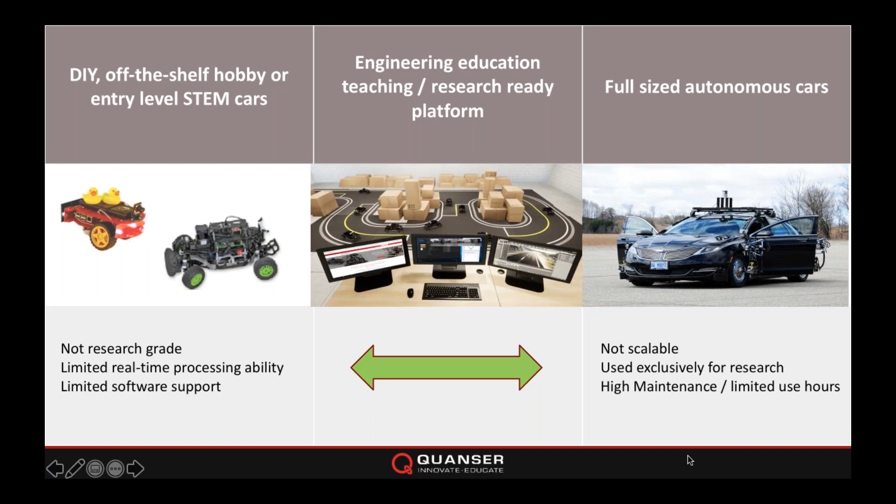So what we decided to do was to take it to the next level and come up with an entire studio, an ecosystem that would not only be able to address the problems that we defined on the left and on the right, but also act as a student-proof and academically appropriate platform for teaching and research when it comes to self-driving cars. So that's how this whole thing started.

And at the end of the day, we came up with what we think is the only validated platform that can be used to accelerate, expand, and sustain research in self-driving technologies. What we mean by that is that if you look at research groups out there, there are new research groups just starting, and they need to start producing results in a very short amount of time. So this studio is designed to help these groups jumpstart autonomous car research programs in a very short amount of time and establish new research capacity in AI, machine learning, and all the sub-related areas, as well as having access to an academically appropriate solution that allows the research team to go from idea to full implementation under a single umbrella and using a single platform.

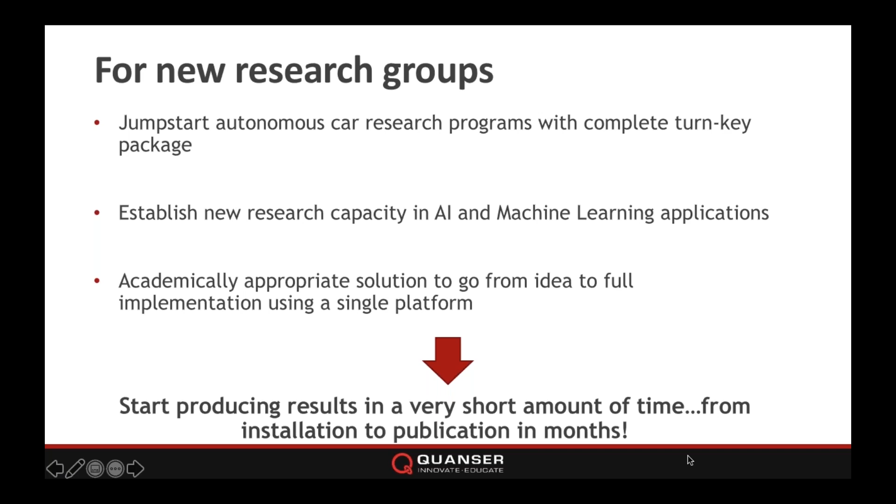And at the end of the day, what this means, bottom line, for the research group is that they can start producing results in a very short amount of time that otherwise they would have spent creating, maintaining, or troubleshooting a platform, and they can go literally from installation to publication in months. But you also have a whole bunch of existing research groups out there that have a whole bunch of platforms, anything from what we saw earlier on the far left or the far right could be out there already. So how can we help those existing research groups?

Well, this can help them expand their research portfolio in terms of hardware and software. Not only can they grow the collection and variety of the vehicles they use in their labs, but they can also, in a very short amount of time, add support for the languages they weren't using, but were hoping would be available for cross integration between their vehicles. So at both software and hardware level, this is an expansion for existing research groups, as well as it helps them get rid of the dirty work they're definitely familiar with, which is the work of cross compatibility and integration between multiple development environments.

And again, what this means, bottom line, for existing research groups is that it will create a major shift in their group efforts and their group behavior. It will create a massive wave moving away from maintenance and housekeeping to doing actual research and validation and producing results. So what is it? Let's start looking at it.

Actually, the centerpiece, or the star of the show, the star of this studio, is obviously the car itself, the QCar. It's a 1/10 scale model of a car.

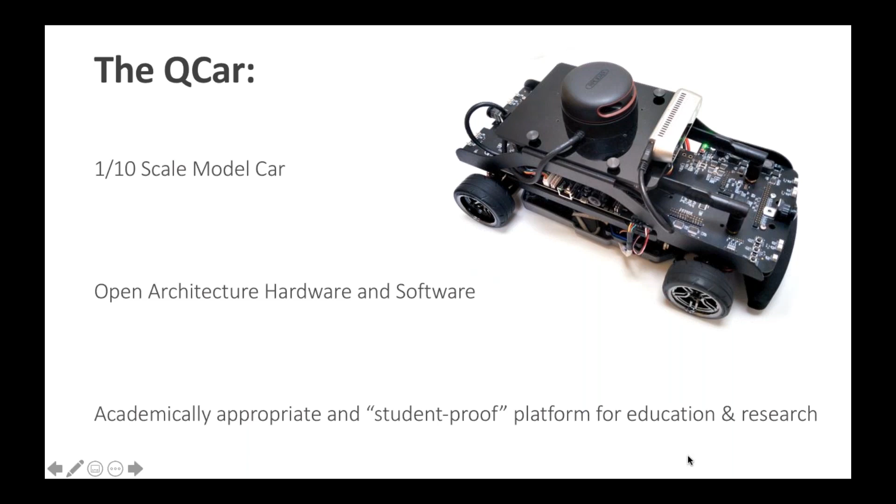Completely open architecture, both in terms of hardware and software. Most important is that it's an academically appropriate and student-proof platform for education and research. So of course, it's sensor rich.

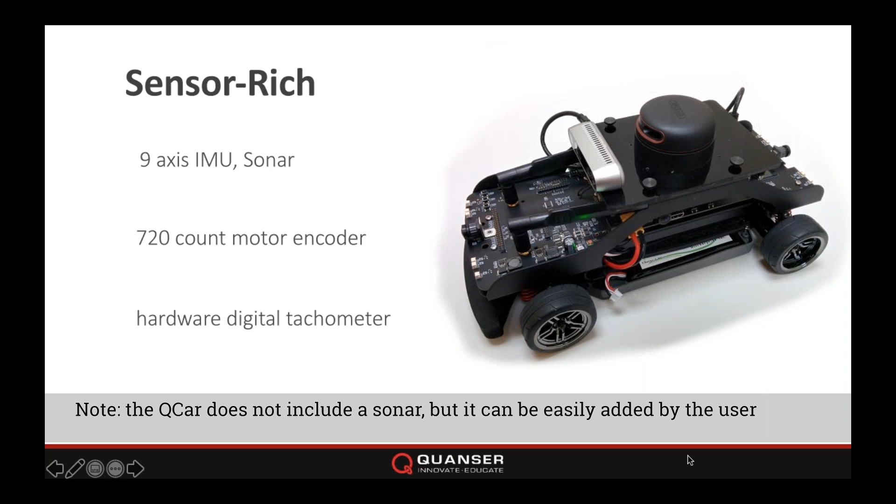It has pretty much all the sensors that you would expect to see on an autonomous car. These are just a few. Of course, you would expect to have a 9-axis IMU, sonar, encoders, digital tachometers, and the list goes on. We can definitely share specifications.

In addition to that front-facing camera that we just saw, we are also very proud and taking advantage of 160-degree view cameras installed around the car to provide, at the end of the day, a 360-degree view.

What we've done, which I might ask my colleague Derek to comment on at the end of the presentation, is that we've taken advantage of the GPU capability on the NVIDIA for processing these camera images right there, instead of going through any other protocol or passing it on to a host station. We're doing it right there, which has huge advantages when it comes to research in safety, and research when the vehicle is basically processing a lot of data, moving at high speeds, and needs to process a lot of data very fast to make fast decisions.

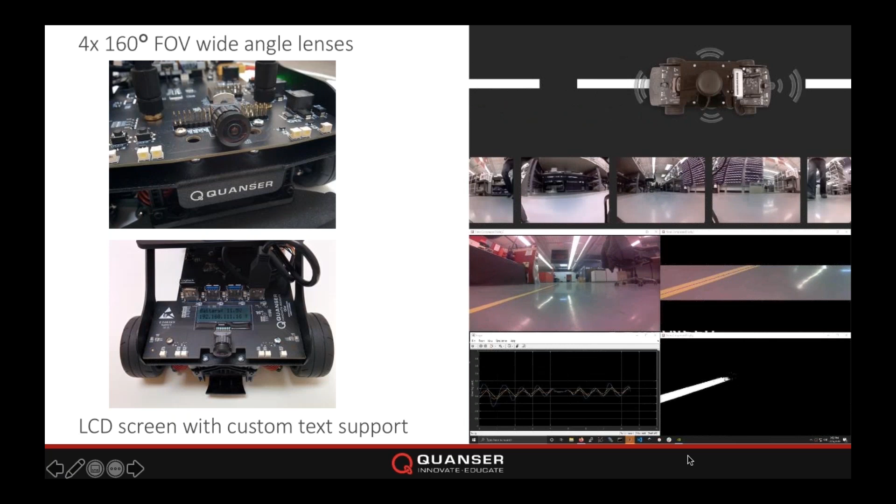In addition, we also have an LCD screen with custom text support. It also shows battery level and IP address by default, but that text can be customized. As you would expect, there is HDMI and USB ports to interface. One nice thing this allows is that you can also develop right on the car by connecting a monitor and your keyboard and mouse directly to these ports.

You can actually turn the car into a development environment. But of course, you also have the option of developing on the host station, which we'll talk about in a second. One of my favorite and one of the most interesting features of this car, which allows us to position it at the middle of the table I showed earlier, is this expandability, both in terms of electronics as well as mechanically.

When it comes to electronics, there is an array, a whole bunch of available I/O in the form of SPI, I2C, general purpose I/O, encoders, digital tachometers, and also a whole bunch of USB, HDMI ports. There is CAN bus support on this. What that means is that the user has full control on the scalability of this, customizing it with any type of third-party electronics that they would like to add to the car.

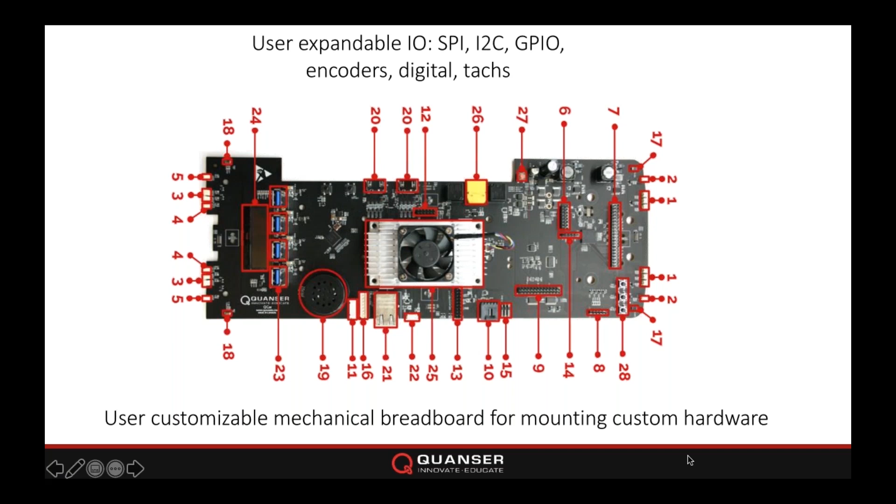Bottom line, for the user in the lab, this positions the car as not just a research platform, but something that students can also use for their custom projects, design projects, and maybe even competitions. When it comes to mechanical expandability, we will provide a user customizable breadboard for mounting your own custom hardware, which makes it appropriate for the purposes I just mentioned. And of course, there is programmable headlights, brake lights, turn signals, reverse lights, as well as microphones and speakers, all accessible through software.

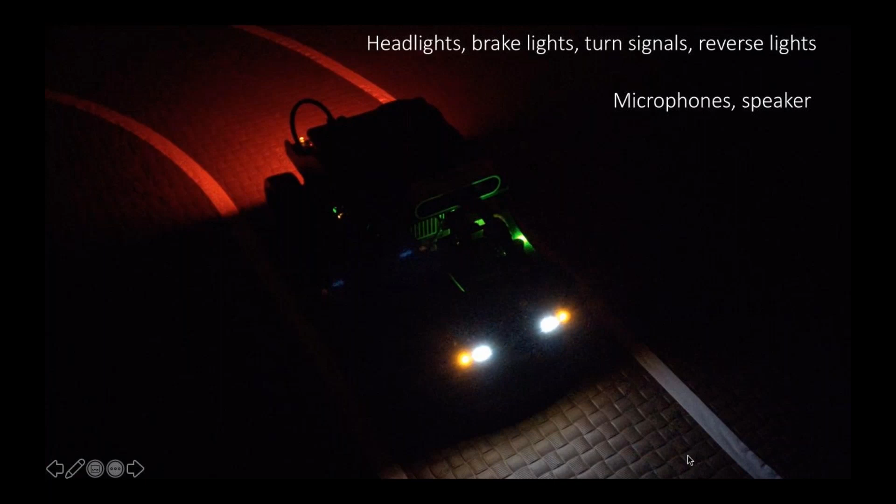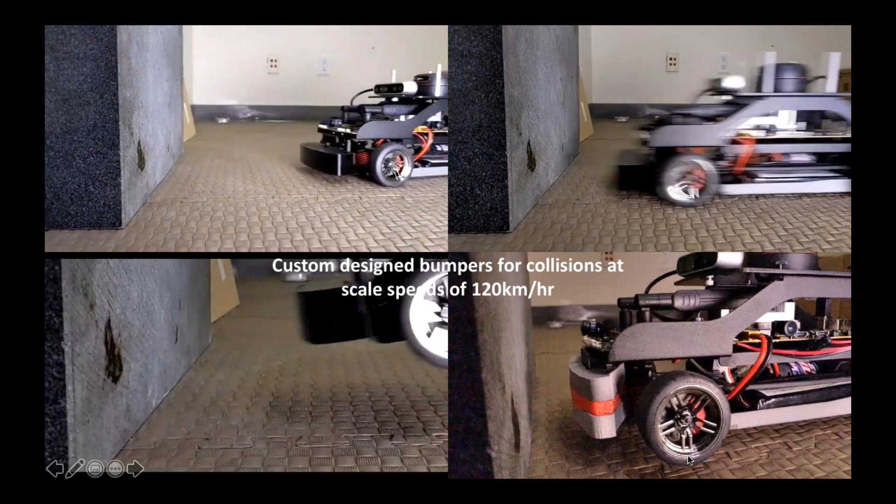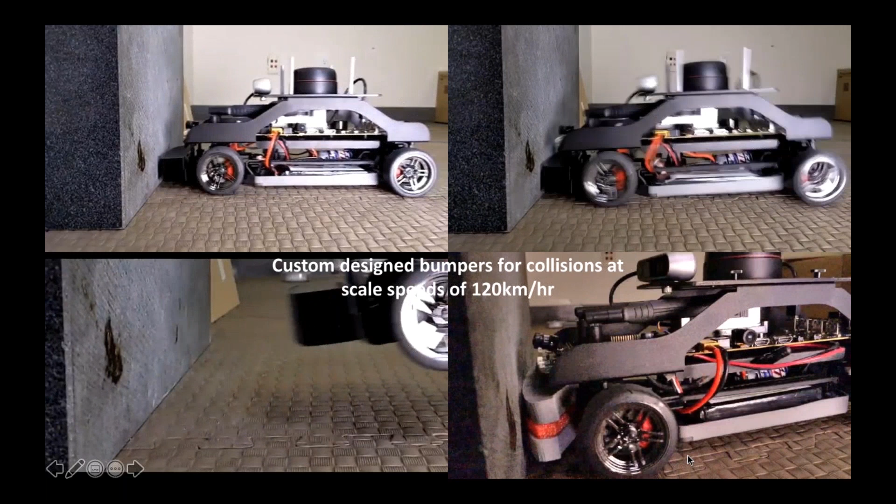Before moving on, just like we have done a lot of research on impact resistance on our drones and aerial vehicles, we try to bring that same expertise to the ground vehicle, because this is no different than the drone. It will be used for research, in unknown conditions, running codes that are not validated yet. So it has to be impact resistant, because we are claiming that this is shifting focus from repairs and maintenance to research.

That's why we spent a whole bunch of our design time on crash testing this and going through several iterations of custom bumper design and bumper-to-chassis interface, to make sure that not only the mechanical integrity of the car is maintained during a crash, but also electrically nothing breaks, no PCBs are displaced or broken, no cameras displaced or broken. This video shows that we've achieved it pretty nicely.

But as I said, it's not just a car. It's an entire studio consisting of many components, the first of which is the ground control station, which is a very high performance PC with RTX graphics card, pre-installed with supporting tools for the QCar development, coming turnkey with all the software necessary installed, such as our QUARC software license, as well as a whole bunch of other software packages.

We will provide 3 monitors for ease of development and ease of application monitoring and running, as well as a high performance router and wireless infrastructure.

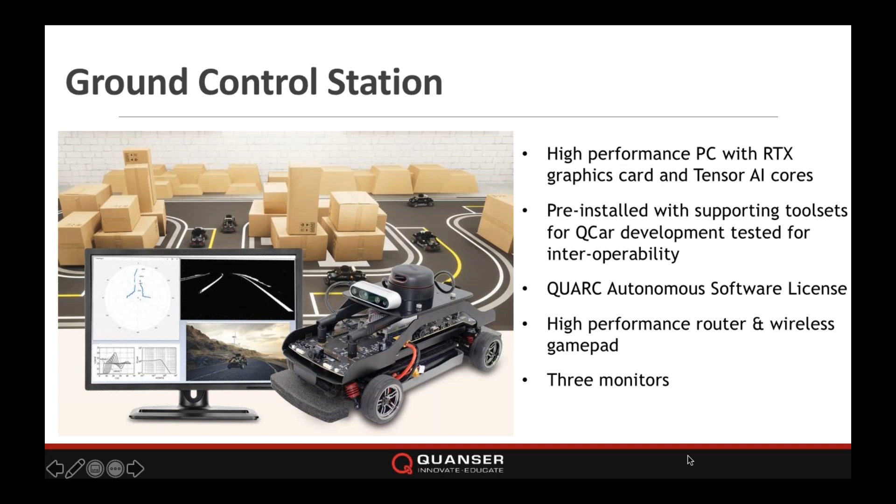When it comes to software, when you look at this community, MATLAB, Python, C, and ROS are usually the preferred and chosen development environments. So not only have we made sure that we support these languages, we've also spent a lot of time making sure that cross compatibility and proper talking between these languages is possible. That's very important because it takes the burden away from the researcher to make sure that compatibility of one software doesn't contradict with the requirements of another.

We've taken care of all that dirty work, and this allows the user to do parts of their development in ROS while they implement the rest in another preferred language, and get these to talk to each other very smoothly and with no effort.

When it comes to ROS, for example, which is one of the top preferred languages for these research applications, our car will come with pre-installed ROS packages. We are playing around with Gazebo support, and we will provide a few out-of-the-box examples, such as a simultaneous localization and mapping one, as well as open code to allow users to add their own functions.

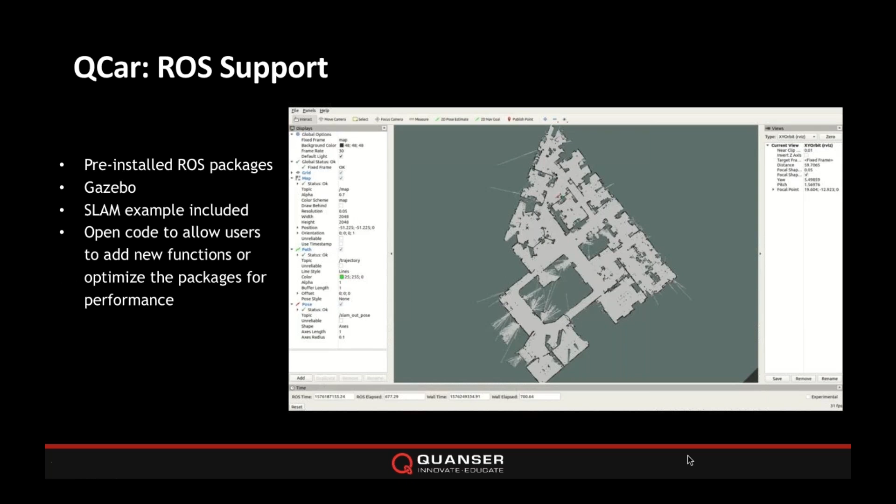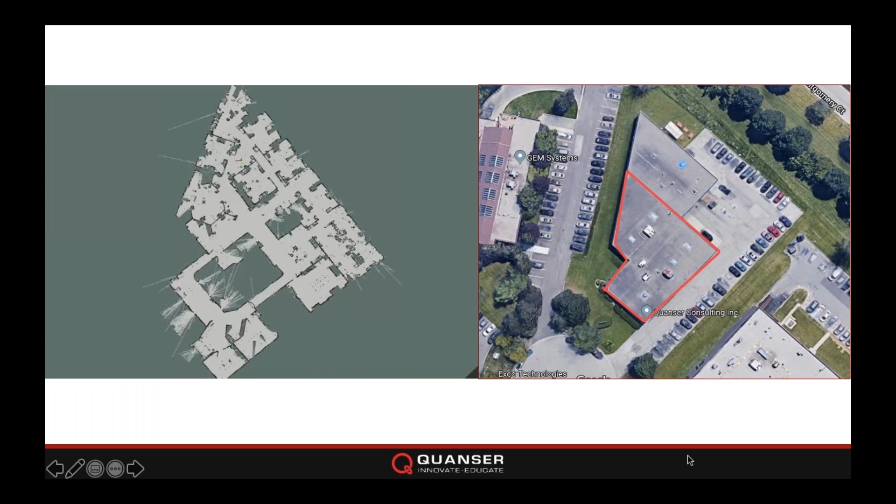What you saw on the right was a video of the car actually mapping our own Toronto office by driving around and creating a map, which if you compare it with an aerial shot of the office and the area it mapped, it's pretty accurate. It's a good out-of-the-box example to put in front of students and see what they come up with when they have such an infrastructure.

Moving on, more Python and Simulink examples involving autonomy with analytic image processing, such as recognizing a stop sign and reacting to it, as well as vehicle-to-vehicle cooperative adaptive cruise control, and in general, the necessary block sets to let you create multi-vehicle applications of any sort.

So what you see on the bottom right, for example, is an example where the cars are following the road but also avoiding obstacles as they come across them in real time. And you can extend this to include more vehicles or more obstacles.

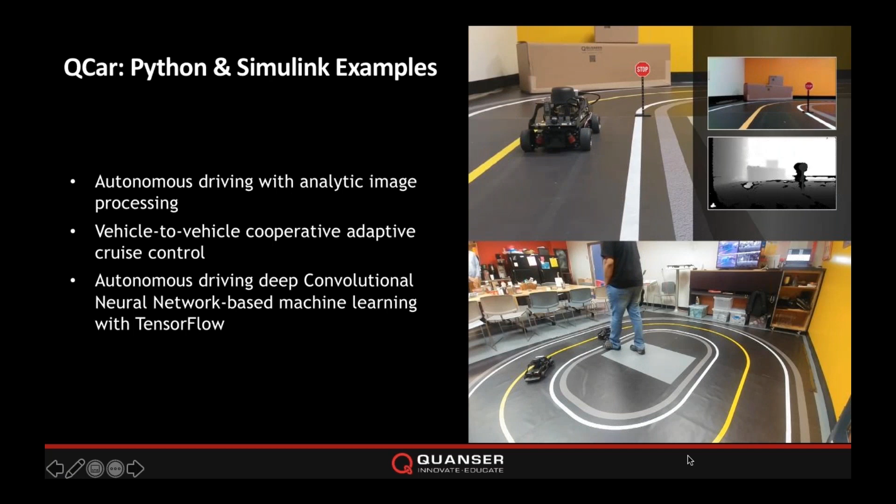But moving away from Python and Simulink, Unreal Engine is also something that we've spent a lot of time with. This allows you to start from pure simulations, such as the ones you see here, and have access to a rigged and animated QCar model, with the ability to simulate LiDAR, depth cameras, and 360-degree videos, and create environments designed by yourself.

This means you can create many different scenarios and exercises depending on what you're doing, whether you are challenging students in the form of a competition, or you're actually validating your code for the first time in the form of a simulation.

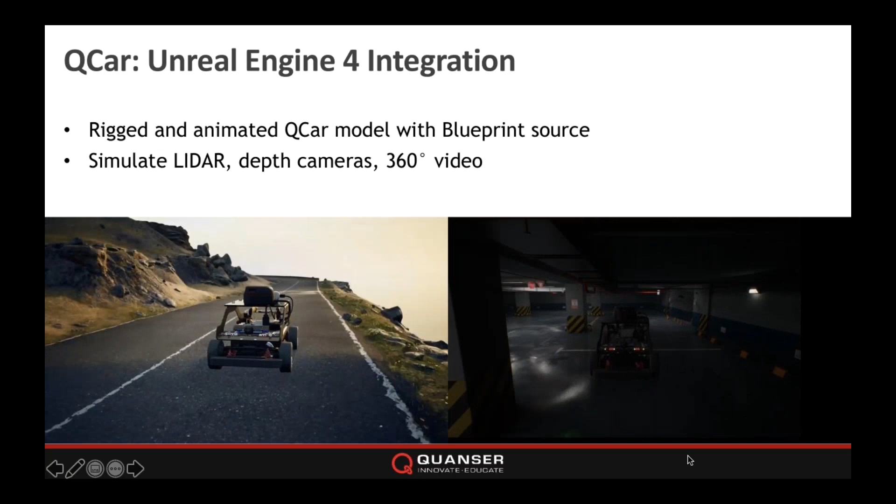This is what you can start with. But things get interesting when you start to think about hardware and software integration in real time—hardware-in-the-loop simulations, where your simulation is talking with the actual physical car in real time. You can have either on-vehicle or on-PC image processing, and we will also provide road segments matched to the physical studio road surface of our solution. But the flexibility is there for users to create their own scenes and scenarios in pure simulation, in conjunction with the real car, or with the real car on its own.

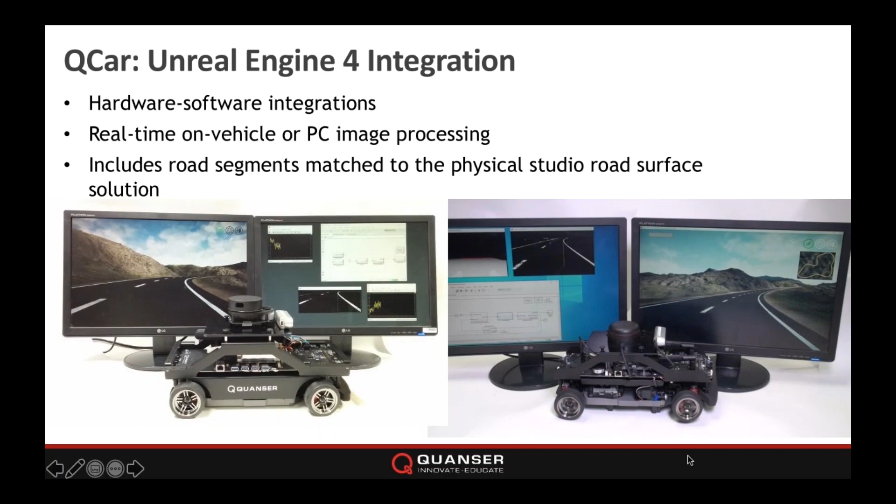We are all familiar, when it comes to any type of research with autonomous cars, with the classic tape-on-the-floor situation. We've all done it, we're all guilty of it. But to make this a maintainable and scalable platform that everybody can use and publish results on, we also thought about the environment and how we can scale and maintain that.

So we will provide training sets that include very rugged and robust flooring that will extend to 43 meters or 140 feet of linear travel, and translate to 700 square feet or 65 square meters of reconfigurable flooring. We will also provide signage for traffic scenarios and various signs.

One thing I should mention about this flooring is that it's honestly very rugged. We've had these lying around our office in various locations, anywhere from R&D to the warehouse, which sees heavy traffic, to see if they actually tear up or not. We've done heavy testing on them, and they're holding up very, very nicely, and they're very modular.

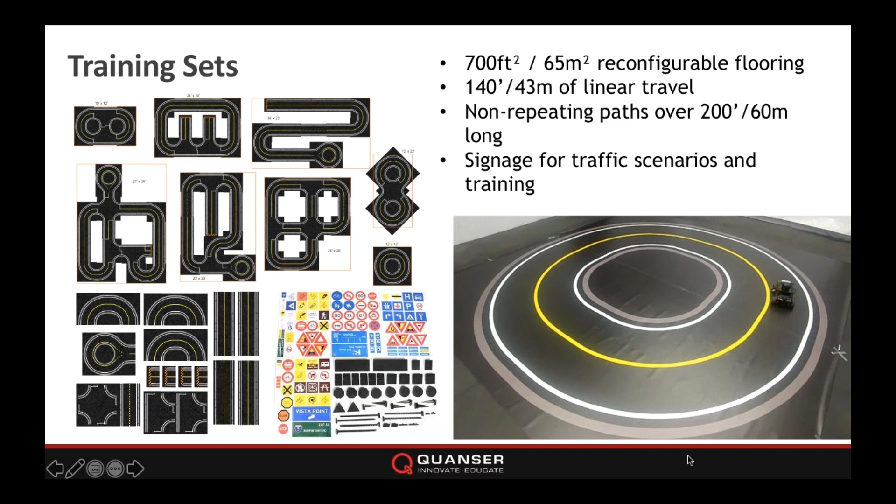As you can see on the left, you can have anything from simple straight roads all the way up to complicated scenarios that are non-repeatable and modular.

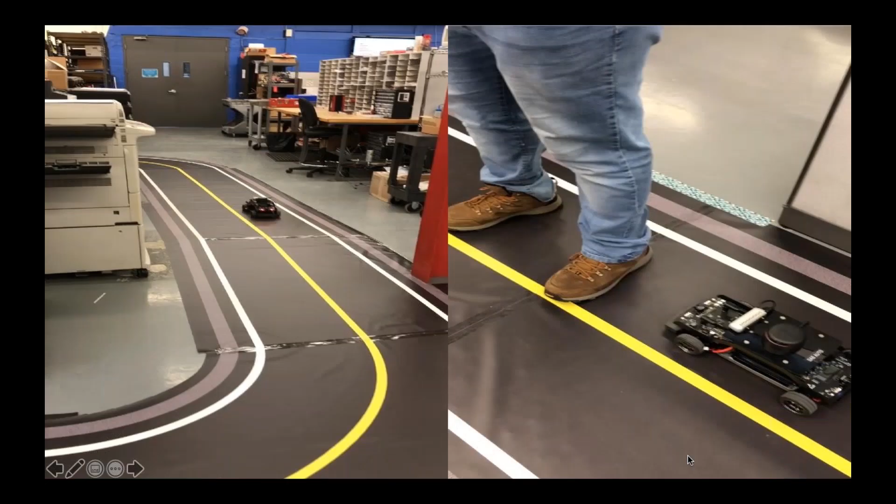So, apologies if the videos are a bit choppy on your end, but this is actually a very long road that we created around our own office. So for labs or lab spaces that are cluttered at the center, or where student spacing is at the center, and it's difficult to create a meaningful, long enough road to do research on, this is how you can get away with it.

The modularity of this flooring allows you to create very long linear roads. Or if your scenario is the opposite and you have a small empty space, the modularity allows you to create kind of communities, or roads built in within that space.

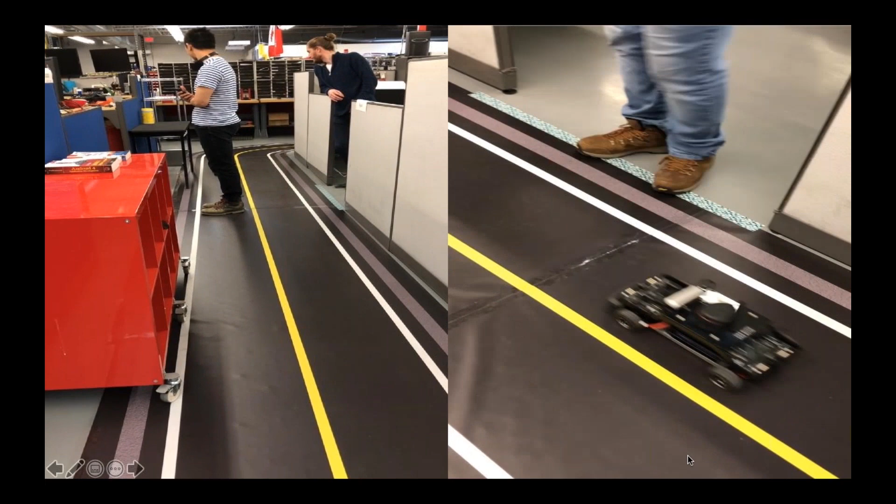So this is it driving in our own office. It doesn't show very well in this video, but it is actually driving at 3 meters per second, and of course it's also avoiding obstacles as it comes across them.

Last but not least, before opening up the floor for your questions, I want to give you a glimpse and sneak peek of what we are working on now that this has been released. We are not done—Derek is certainly not done—and this is where our head is at these days.

We truly believe this will hugely affect the way not only research, but also teaching and student engagement, is done when it comes to autonomous cars and self-driving vehicles. So with that, I will stop and hand it over to my colleagues to answer your questions.

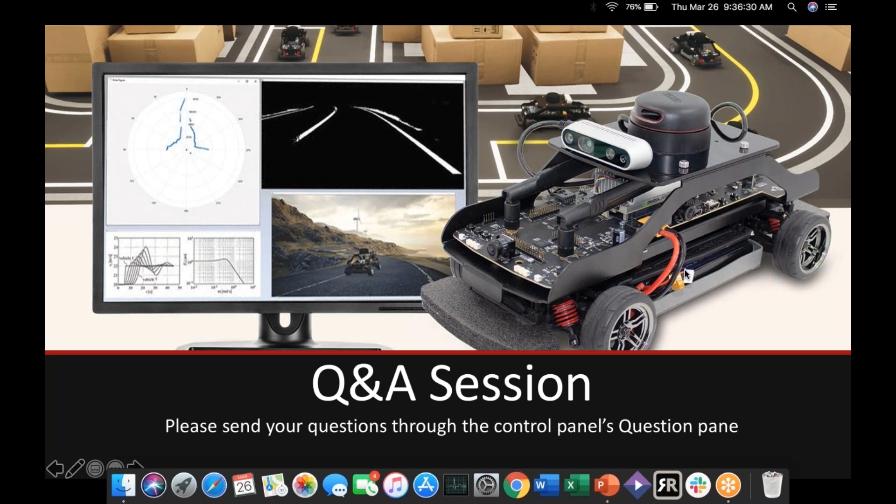So here's one maybe for Pasha to tackle. The Quanser QCar and the entire studio look very interesting and capable, but can you tell us about the expected price range? Is only one QCar included?

Thank you for the question. We'll be happy to provide you with that information. No, it's completely modular. To give you a short answer, there's no limit on the number of vehicles. We have several packages that we offer with 1, 3, 6, or more vehicles, but it's certainly up to the user to choose the number of vehicles based on the space they have available in their labs. When it comes to pricing, we do have distributors in some regions and we go direct in others, so based on your region, we would be happy to either direct you to the right distributor or the right contact within our sales team. We'll be happy to have that conversation even as soon as after this webinar. If you contact us or submit a quote request, you'll immediately hear back from us.

Thank you, Pasha. And there was another question: is the studio on the QCar available now? I'll take that one - that's an easy one. Yes, it is. And we're very proud to announce that we are accepting all interest right now, and we're ramping up our production of the whole studio as well.

There's maybe one more over to you, Derek. A couple of questions in terms of the mathematics, dynamics and kinematics, the various mathematical equations of the QCar, and how do we plan on continued support of the software?